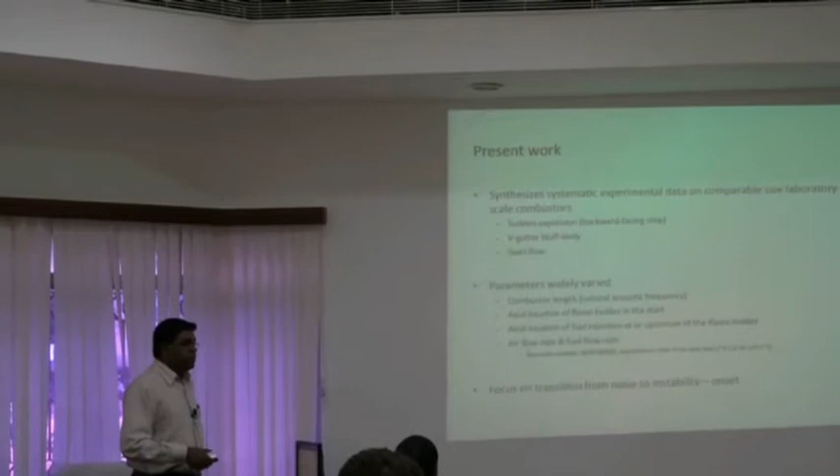So what we are trying to do here is to actually synthesize systematic experimental data on comparable size laboratory scale geometries on three canonical flame stabilization constructs like sudden expansion, which is the backward facing step, the bluff body and swirl flow. And the problem that I had was I started actually assuming that I didn't know any combustion instability, and said let's just vary everything that's possible under the sun, and then see what we will get. And it turned out that people were not doing that with such patience before.

So we just varied the combustor length, of course targeting, let's say, the longitudinal acoustic modes. So we vary the natural acoustic frequency of that mode. Then we have the axial location of the flame holder in the duct, the axial location of the fuel injection at or upstream of the flame holder, airflow rates and fuel flow rates, pretty much recklessly. Sometimes we go very rich as well.

The students don't even bother. They just turn the valves and get the data. And then we figure out, okay, these data don't make sense for practical purposes and so on, but still, nevertheless, we actually get some interesting results.

So what it turned out is that we're focusing on transition from noise to instability, or what's called the onset of instability. Because if you now slowly change your parameters, you now find the point where the instability kicks in. So that's essentially been the focus of the work in most of these things.

So what's possibly new in doing this is we were able to actually look at the combustion instability problem, particularly the vortex shedding related mechanism, as essentially a flow acoustic lock-on problem, similar to flow structure lock-on or structure acoustic lock-on, flow acoustic lock-on in cold flows. So many of those kinds of places where they have this lock-on mechanism, this is something that we also found happening in combustion instability conditions as well.

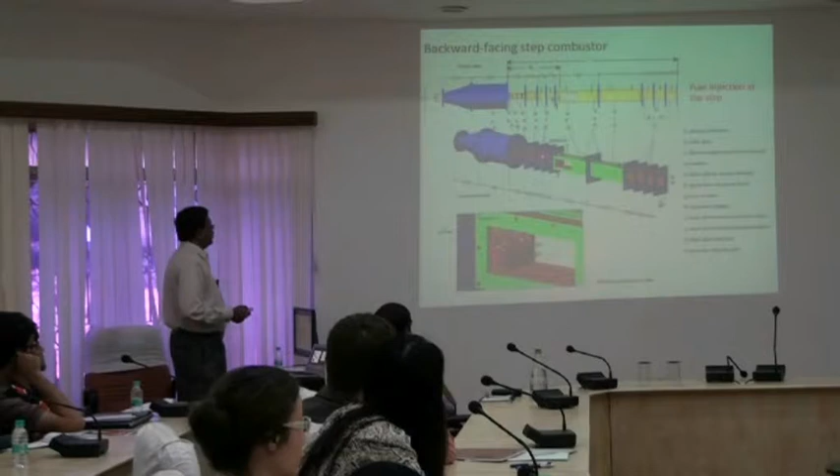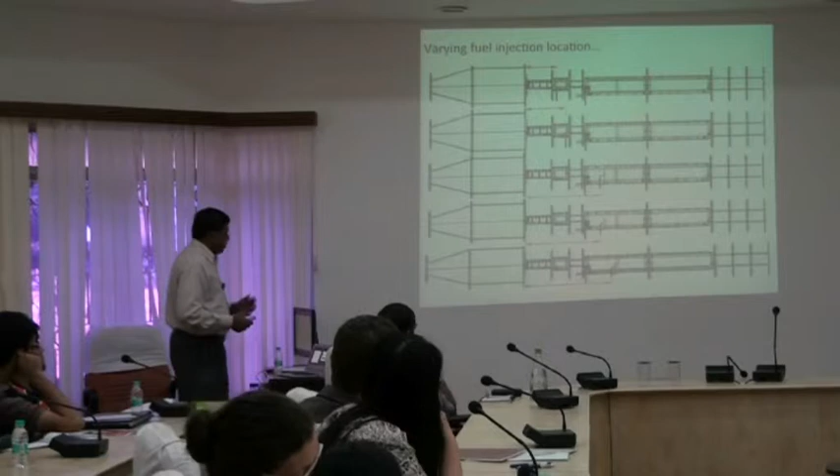And so in the previous slide, sorry, this basically is for a work where we actually injected the fuel right at the step, but we also had several other cases where the injection was upstream of the step. So we injected a little bit upstream. So we had a near upstream injection or a far upstream injection, but also some of the cases where we had injection downstream into the recirculation zone.

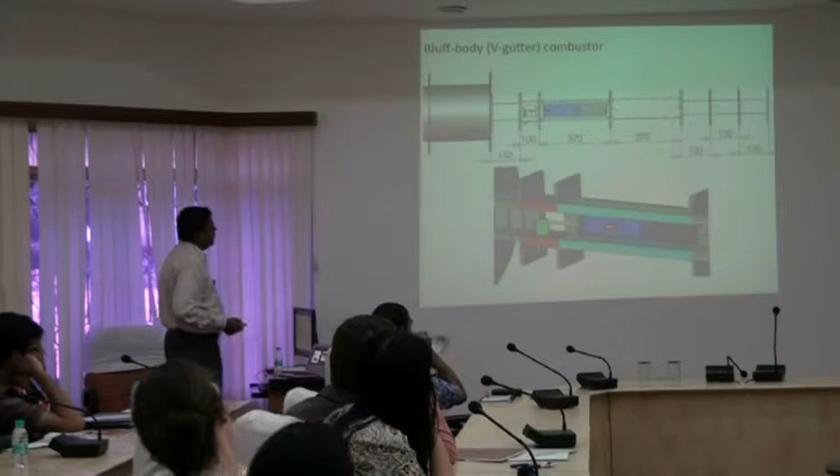And so this basically shows some work that we did in the middle where we actually used a V-gutter that runs along the span of the combustor with a fuel injection manifold a bit upstream, and so we could vary this distance as well, and the V-gutter shape and so on.

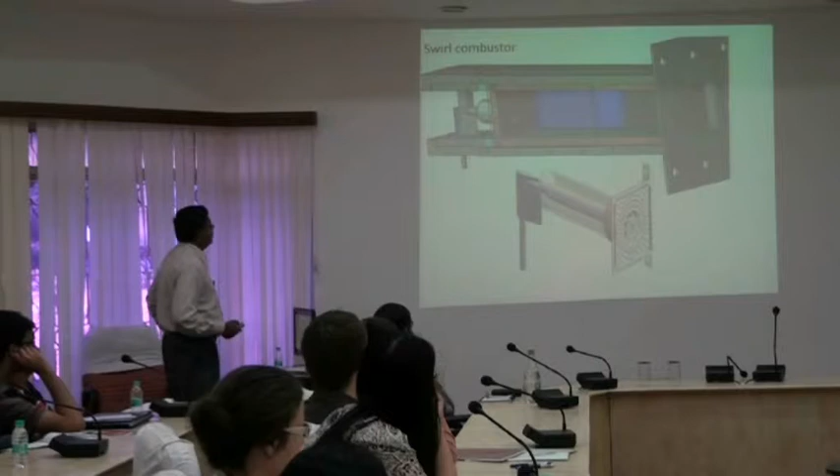That is essentially to make sure that we are looking at one shear layer dynamics at a time. So here we are essentially looking at only the shear layers caused by the swirl flow and not by any sudden expansion. And then we also have the perforated plate allowing for smooth flow coming in.

So how do we understand what these frequencies are? What we've been doing is to express any dominant frequency, F, as a Strouhal number or a Helmholtz number. The Strouhal number essentially characterizes hydrodynamic instabilities, and the Helmholtz number characterizes acoustic modes. If you have a constant Helmholtz number with respect to Reynolds number, you expect a natural acoustic mode of the duct to be predominant, and the corresponding Strouhal number will vary hyperbolically.

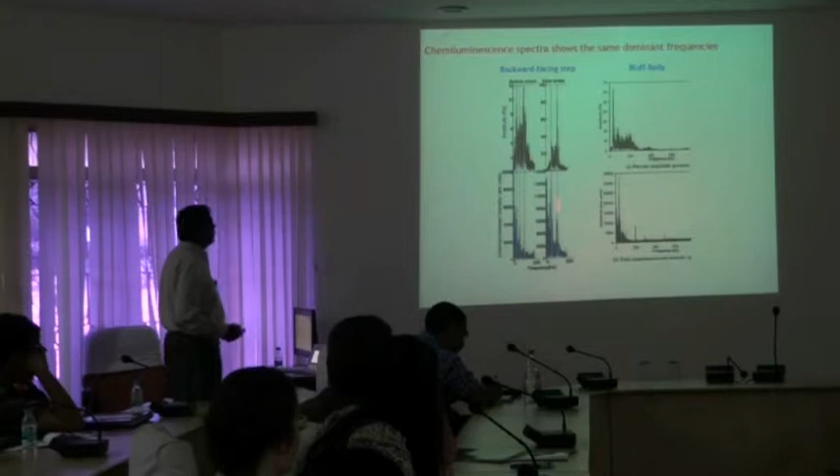This is high-speed chemiluminescence data, so we can actually look at spectra from this high-speed chemiluminescence data and then match it up with the spectra that we are obtaining from the acoustics, and then relate to the frequencies. And where there is constant Strouhal number, we see a vortex and then it's a vortex mode, period.

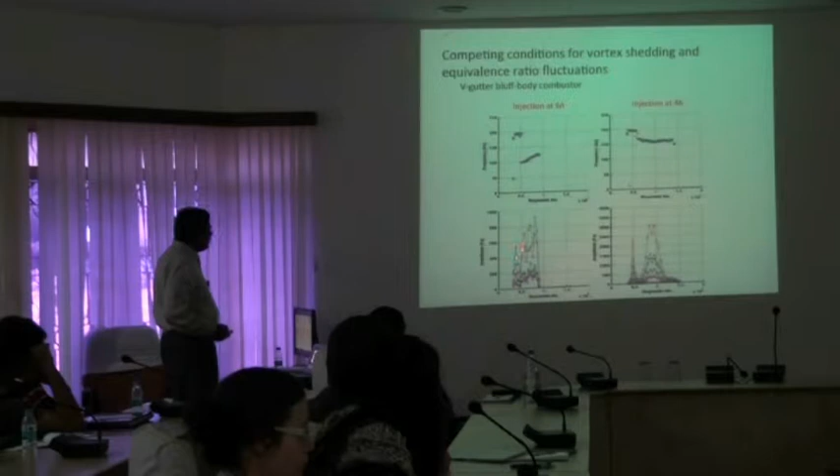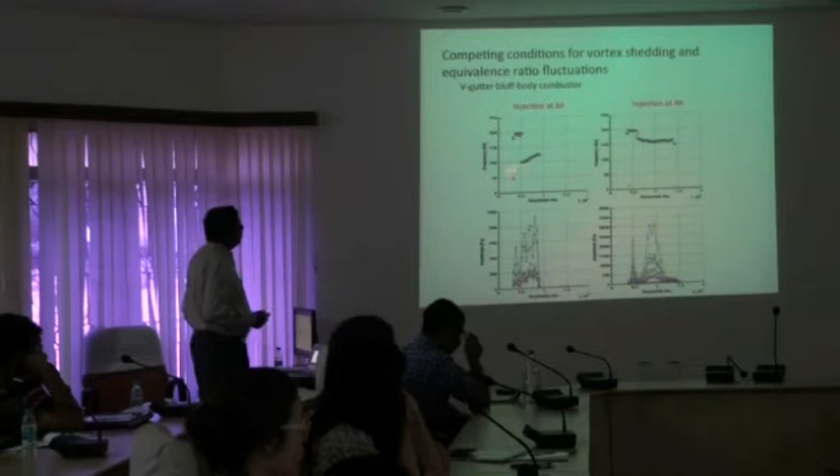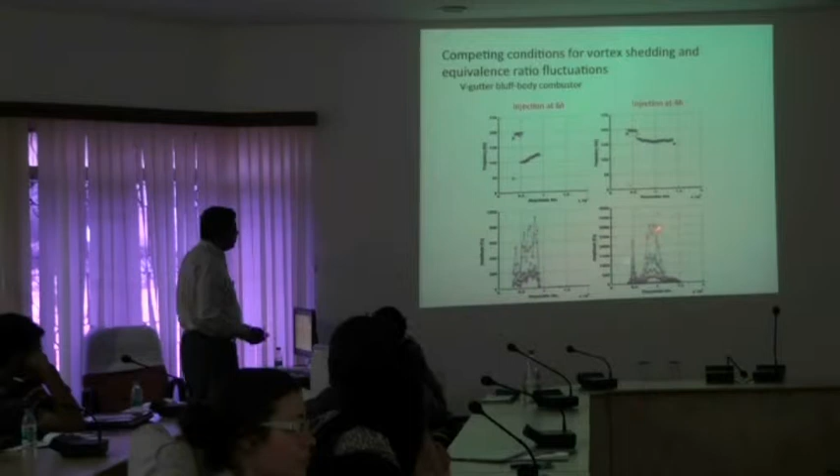So we also found this in the bluff body combustors, where you see that this sudden shift in the frequencies corresponds to a rise in amplitude, but as the amplitude rises, it's now going up and down. So this is actually for a distance that is a little bit greater upstream of the bluff body, but this is a little bit closer. You don't see this increasing trend. It's actually more like a constant frequency corresponding to the duct mode, and so you do see some up and down amplitudes as well. So we wanted to see what that really means.

So if the flame is going to unwrap itself from the vortex and then try to come back, and that's when you are having a lean mixture, it's going to oppose the motion of the flame that is trying to come back. So it's going to retard this motion. And that's going to give rise to smaller flame area fluctuations and therefore heat release fluctuations and therefore a local minima in the acoustic amplitudes.

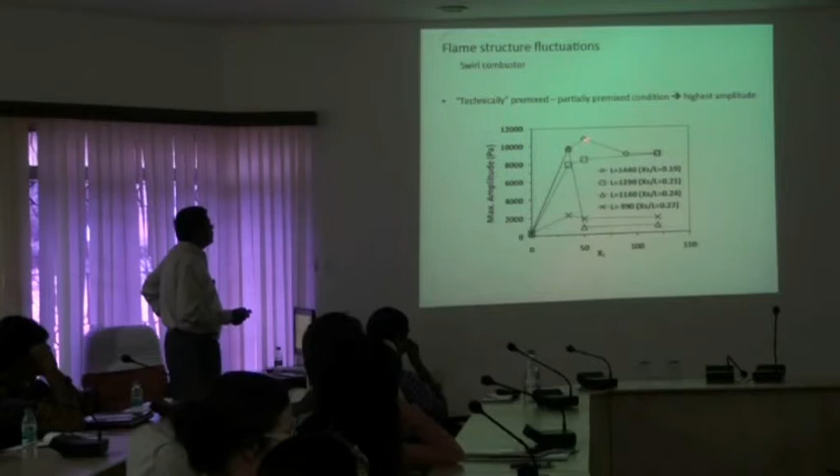These are all around 500, 600 pascals, so it's not very low. But relative to that, you're having things close to about 9,000 pascals when you're having a premix mixture, showing that the premix flames are giving rise to larger instabilities. But the more interesting thing is what's happening here. When you now inject at an intermediate distance upstream of the swirler, you're actually having excess amplitude. So you're actually exciting more. So what's going on?

Similarly, if you now look at this transition that we were talking about, as you have a more or less noisy, low amplitude oscillation that now begins to grow as you change your Reynolds number or any parameter, we found that the rate of growth of the oscillations is actually the maximum for the intermediate injection location when compared to either closer or farther away. So this basically shows the growth rate of these oscillations.

So we tried to do OH PLIF of this, and this is actually phase-averaged OH PLIF of injection at the swirler. This is injection at 50 mm upstream of the swirler, and this is injection 120 mm upstream of the swirler. We phase average about these angles and look at how this works. What we found was that even though we phase average for about 90 images, the average structure still looks close to instantaneous structures, which are quite multi-dimensional, and it's actually fairly low intensities as well, compared to what you're seeing here.

But now you look at this. The intermediate one has structures that look more like that, and there are some events that look actually more like the premix case. So the intermediate injection location has a flame structure that is not completely mixed, and of course we had also done acetone PLIF to characterize the level of mixing for these different locations. I should have shown the acetone PLIF pictures, apologies. From the acetone PLIF pictures, under cold flow conditions without the acoustic excitation, we wouldn't really say this is much less mixed compared to this. It would look reasonably mixed.

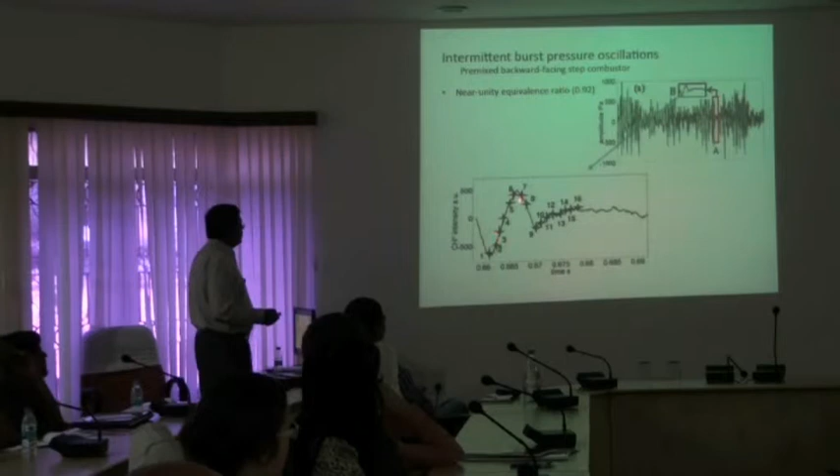So we want to investigate a region where it is growing up and then coming down, and then beginning to become silent. This is the end of a large amplitude fluctuation burst, and this is now traversing towards a quiet zone. So we try to look at how high-speed PIV works out under these conditions. The left set of images show the high-speed PIV and the corresponding high-speed chemiluminescence images, and the right side for the case where the regular oscillations are happening and then decaying down.

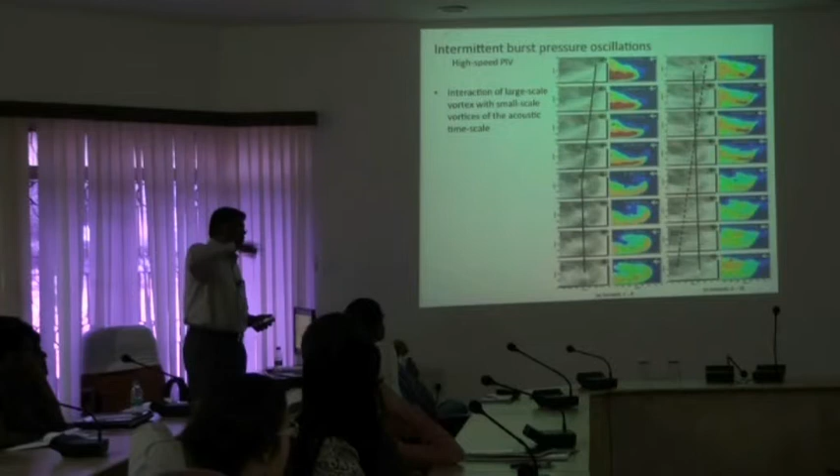Going back to the slide. So this set of images, the right side set of images, are actually showing this set of images where the sound is getting quieter temporarily. So fundamentally, what's happening is you have a nice vortex roll-up that is beginning to be seen in the chemiluminescence data, and correspondingly we can see one large-scale structure that's happening in the flow field, more or less. So this is going to actually stay over here, and then wait for the next thing to happen.

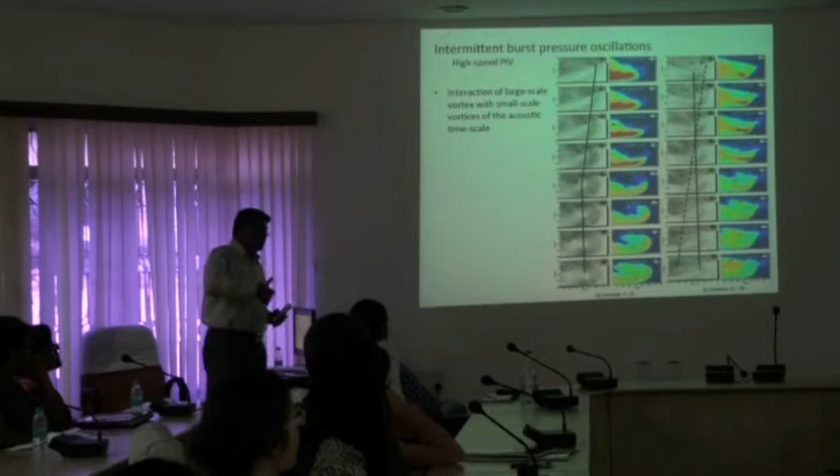So what is actually stopping this vortex is the small-scale vortices that are happening at the acoustic time scale. So this is actually a case where you're having a slight mismatch between the time scales of the hydrodynamics and the acoustics. And when you have a large-scale vortex structure, it's giving rise to a nice flame roll-up and large-scale flame area fluctuations relating to high-amplitude excitation. And that gives rise to nice vortical roll-up.

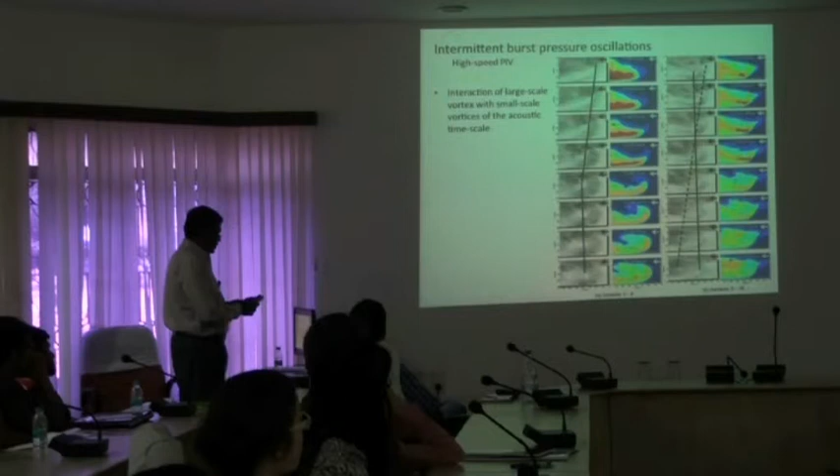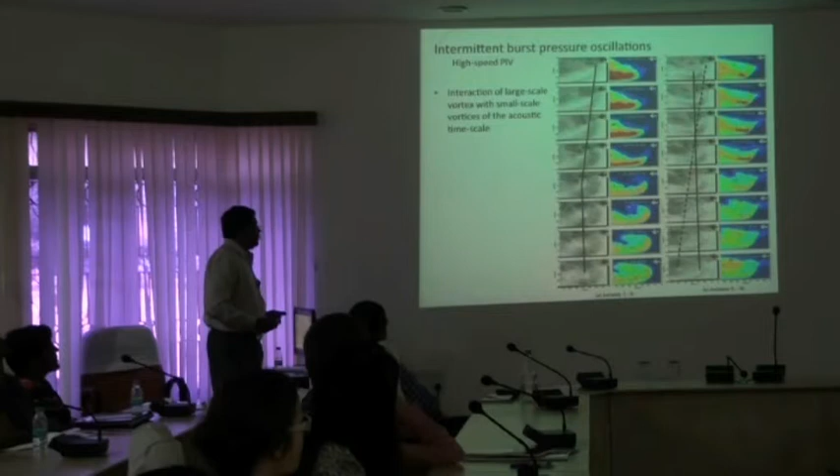But the moment you have this nice vortex roll-up, then in the next part of the cycle where the acoustics comes down, the vortex roll-up cannot happen anymore because the vortices are essentially being rolled up because of the acoustics. Then you have the small scale vortex roll-up that's coming up at the acoustic time scale that is interacting with the large scale roll-up. So this large scale structure is still remaining. And then straddling along with that is the small scale roll-up that is actually trying to destroy the structure of the large scale roll-up, and hence the roll-up of the flame. So the flame is no longer having a nice structure anymore, and that gives rise to low amplitude excitation.

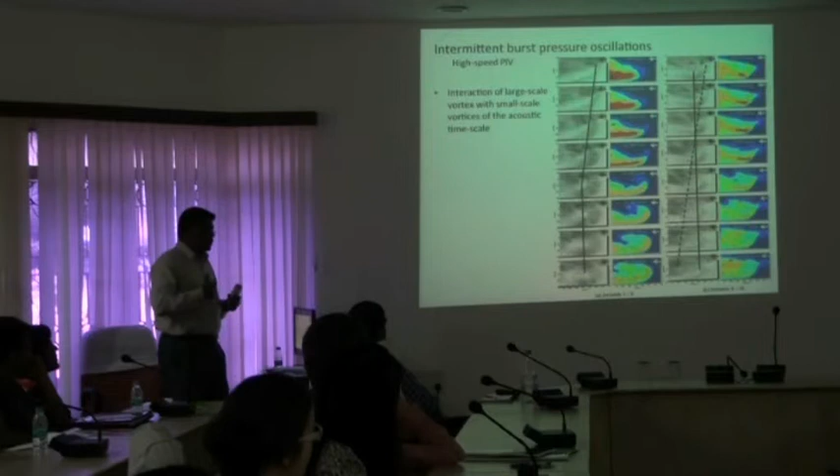So this shows the interaction of two flow structures at two different time scales, one corresponding to the backward step geometrical length scale, another one corresponding to when you have the natural acoustic modes, acoustic oscillations exciting small scale vortical roll-up that interacts with the large scale.

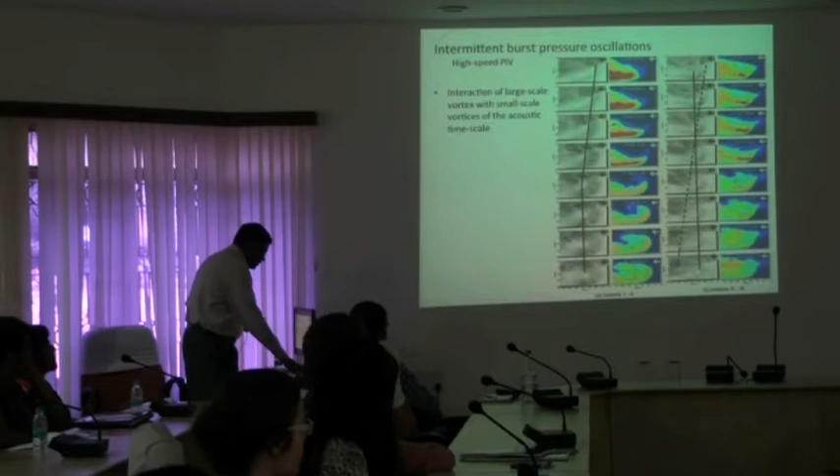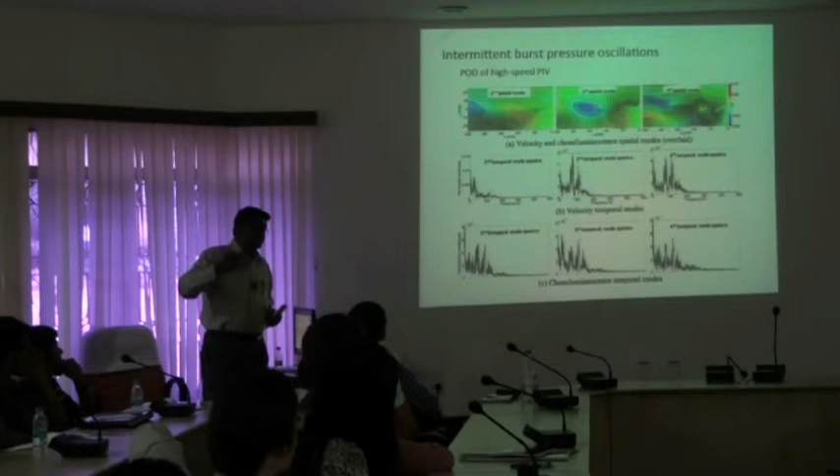So if you now look at a POD of this, what essentially POD does is to statisticize the whole thing, right? So when you're looking at instantaneous images, you can always say, yeah, sure, you got all that stuff in one particular instant, and you could explain it, but is it happening over and over again? So one way of showing that in the statistical sense is to look at the POD modes. Even though you have a fairly unsteady flow, the POD essentially gives a statistical sense of what's the most dominant feature in the flow, regardless of the unsteadiness.

And therefore, you see that this is actually the second spatial mode. The first spatial mode corresponds to the mean flow. The second spatial mode essentially corresponds to a bulk motion in the shear layer zone. That's not related to the vortical structures at all. But the third spatial mode is something that we couldn't understand in the beginning when we started looking at the POD, until we actually looked at the high-speed sequence for that particular segment that I showed in the previous slide. So we can actually see the interaction between a small-scale vortex roll-up and a large-scale vortex roll-up over there, unlike the fourth spatial mode where you see the big large-scale vortex mode.

And this actually comes out in the way the temporal modes of the velocity and the chemiluminescence can be looked at from the temporal mode spectra. The spectra of the temporal modes reveal the dominant frequencies that are present. So effectively, what it means is that you're now having this kind of small scale versus large scale interaction predominating over the prevalence of the large scale mode itself, because the third mode has a greater energy than the fourth mode, and therefore we conclude that the interaction is the one that's causing the burst oscillations and preventing the large scale structures from prevailing over and over again.